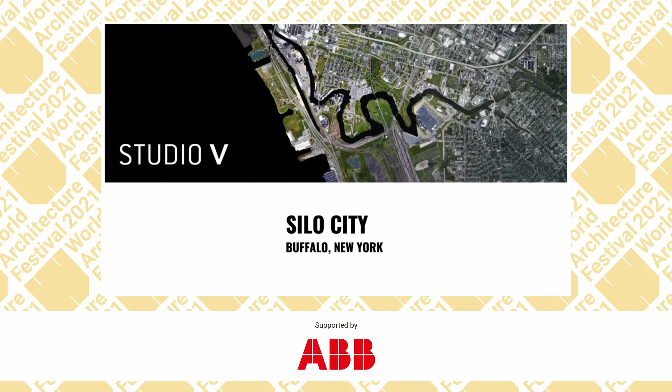I was born in Buffalo, which I consider to be one of the greatest ruined cities in America. My father worked in the steel mills and my mother taught English. So this led to my two interests in abandoned industrial landscapes and their effect on community and culture.

Buffalo has the largest collection of grain elevators in the world. This led to an incredible period of urban growth, and these are the examples that really redefined modern architecture. These are the grain elevators visited by Gropius, Mendelsohn, Le Corbusier that really influenced the whole course of modern architecture. Mumford talks about cities, the things we need to make them.

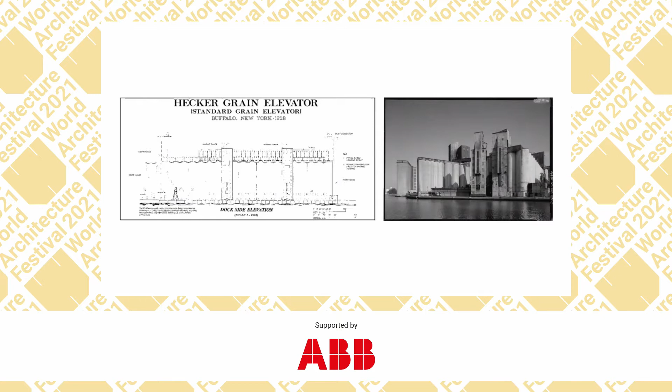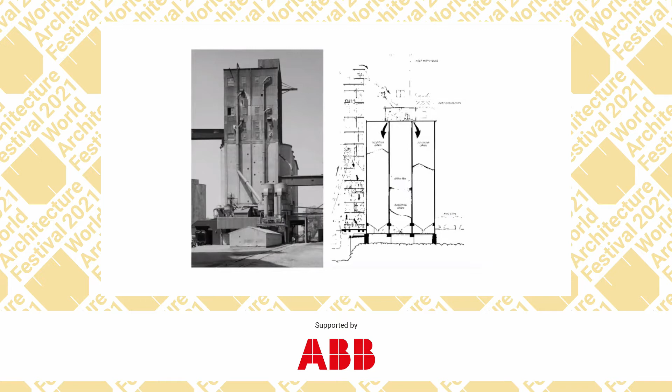They begin with the castle and the shrine. These are kinds of new citadels for cities with no walls, but really the granary and the development of the granary actually led to, in the grain elevators, the explosion of urban growth that occurred across the world.

Today, these buildings lie in ruins. They're abandoned. These beautiful massive structures have incredible, almost limitless interior spaces. And so really, the question is, what could we do with them today?

This actually shows some footage of the surrounding area where you get a sense nature has started to take over the grain elevators. Their concrete forms are in contrast to the kind of greenery that has begun to overtake them as a series of gardens and ruins. The relationship of these great rooftops to the surrounding oceanic lake of Lake Erie really made them very, very incredible in terms of their relationship.

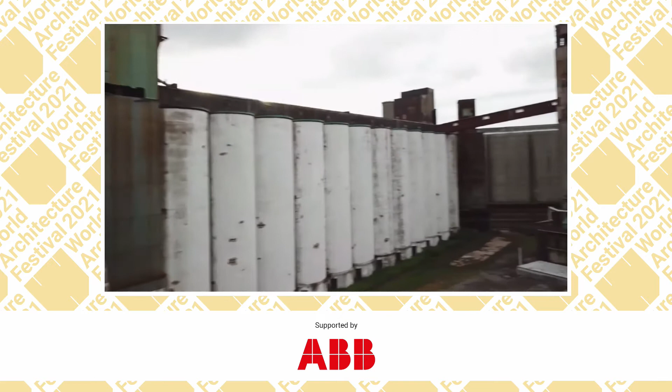And they were purchased by a man named Rick Smith, a very unusual man, a third generation entrepreneur. He started to ask how he could develop a vision for these, to create something new, to bring them back. He's a musician, a dreamer, but he inherited a massive steelworks, and he asked us how we could start to come up with a new idea for them.

So I begin with something a little bit unusual, because unlike most architecture looking at future projects, we thought, how could we create something that is not one singular vision, but that constantly changes over time, like the grain elevators themselves? And so I reference in 1836, just 6 years before the grain elevator was invented, there were these wonderful paintings by Thomas Cole.

They were called the Course of Empire. And they tell the story and the arc of change of architecture and how it can grow, and civilizations and empires. It's interesting to me because it creates almost this architecture of obsolescence.

And Buffalo grew from a wilderness city to the grain elevators, which actually led to an explosion in growth. So I'm kind of paralleling the two series of paintings and showing the relationship between them over time, including how it led to the kind of end of the city. So my question is, how could this influence a future project for the grain elevators?

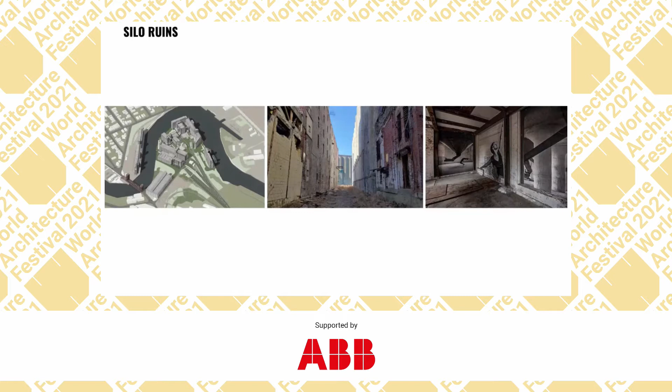Now, we had to document them. We had to go in with drones and interns. It's really an entire city of grain elevators. And we decided not to embrace just one design, but a series of concepts that would overlap four of them.

The first is called Silo Ruins. The whole idea was that it would be a campus with greenery near the river, embracing the ruins, starting to restore the wounded landscape of the Anthropocene and start to engage and tie in with the community. We worked with a whole series of community volunteers to create a series of gardens, including places to gather, initial structures like the Lyceum and Duende, a bar, as well as doing things like occupying the ruins, providing tours.

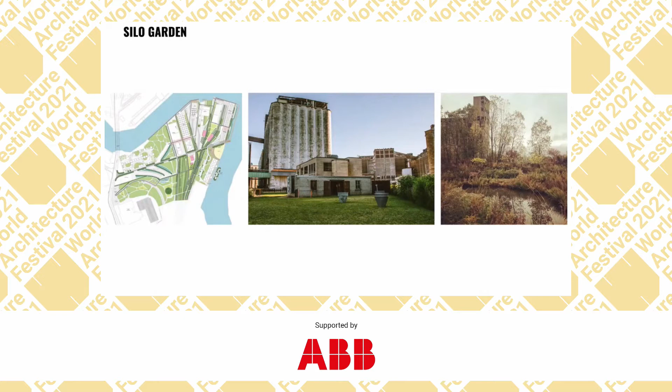And so the next step is silo gardens. These overlap in a certain sense, where we started to create a series of gardens between the silos. This is a future project because it's underway now, but the larger vision is only just beginning to be realized. And so this shows how we start to use bioremediation in order to reclaim native species. We start to showcase how the greenery has overtaken the grain elevators.

And then we started to cultivate new gardens in and around them, with tours to start to really develop it as a site where people could come in the future.

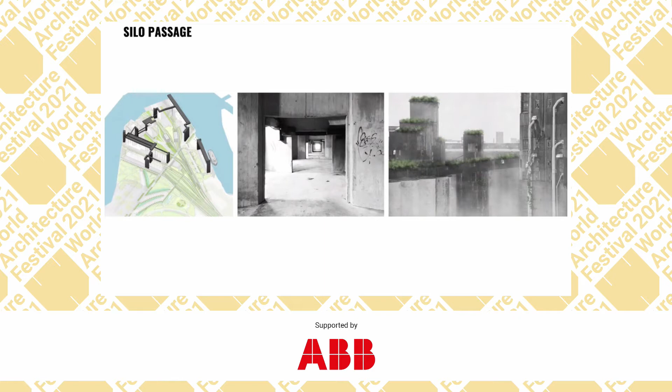Silo Passage is the third phase, where we're looking at taking the elements at the rooftops—a series of conveyors, a series of connections, a series of abandoned bridges—and using them to make one passage that actually connects all of the different grain elevators and the surrounding mills.

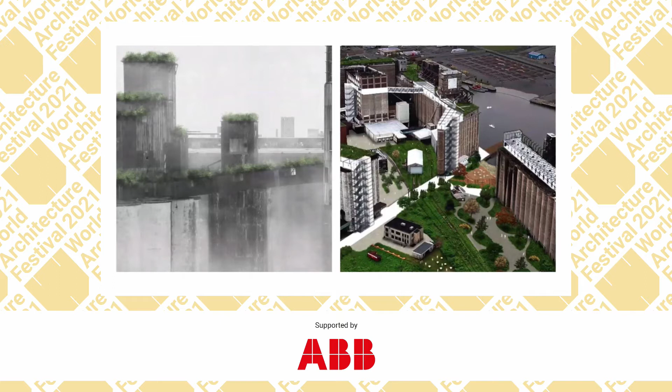The idea is to really create links and connections with these former abandoned spaces, these conveyor spaces, these bridges in the sky, that would link all of the different components and create a series of walkways capturing green roof gardens and extensions all the way through the entire complex.

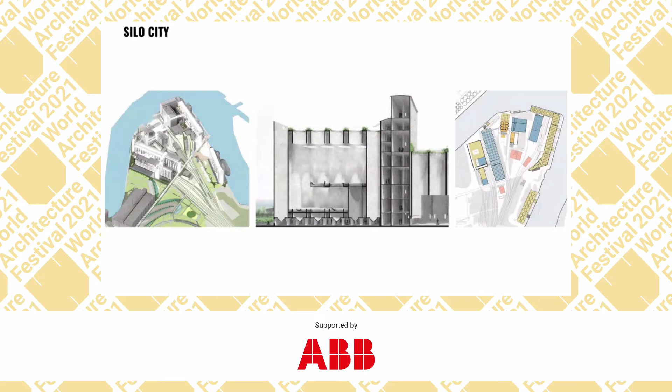The last phase is Silo City, where we're actually looking at a greater vision for the entire community. Different types of architecture in the silo and mill buildings led to different approaches.

The silos themselves—we're looking at arts and cultural spaces. We're not really cutting windows in them. We wanted to actually make spaces that would preserve the integrity of the structure.

But in the mill buildings, we could create a series of spaces that would actually support the arts and cultural uses. So we're looking for a great range of spaces.

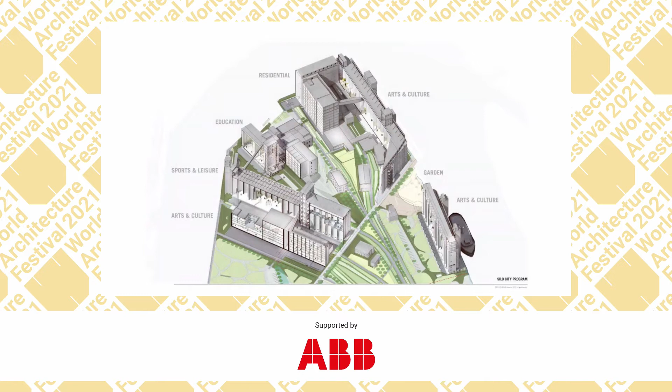And we started to do performances, venues, operas, spoken word, different kinds of connections within them, leading to a larger vision for the entire complex where each of the individual buildings would have different program components.

We would link them together with a series of gardens and reconnect the waterfront with a whole series of different uses, reinventing the nature of arts and culture by carving out the volumes within the interior and using the mill buildings in between for more standard uses such as residential, affordable housing, artist housing, makerspace, to support the more unusual spaces within the elevators themselves.

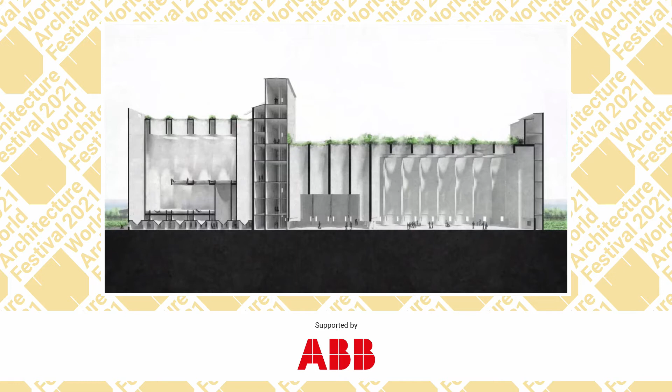The elevators are perhaps the most interesting part. Working with a brilliant structural engineer, we found we could carve out the volumes from the interior, top-light these spaces. We're looking at a combination of galleries, museum spaces, gardens on the rooftop with a series of skylights.

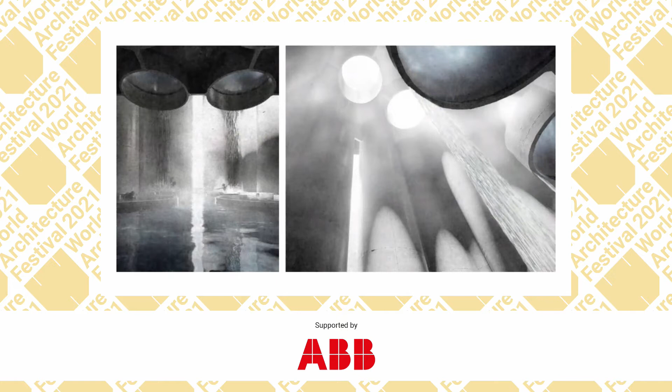But also more shocking uses, such as the image on the right, where we're creating a vast natatorium, almost like ice cube trays, where we fill the silos full of water and do a series of cascading gardens and waterfalls, beautifully lit from above, from the tops of the silos, to maintain the integrity of the structure.

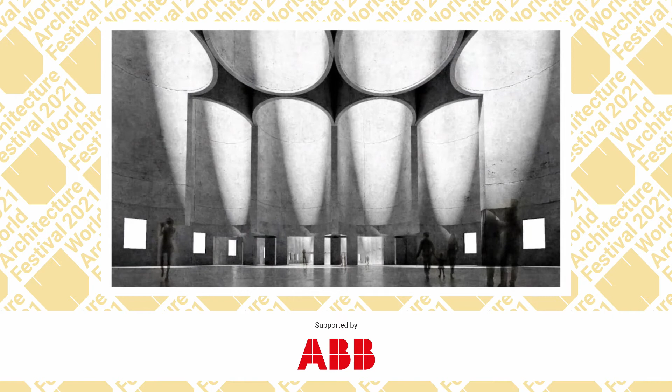In other spaces, we can create galleries and art museums, large open spaces that can support different arts and cultural uses. We're working both with local artists to do installations and spaces within here, and contacting institutions to see if we can combine unknown artists with those that are more famous.

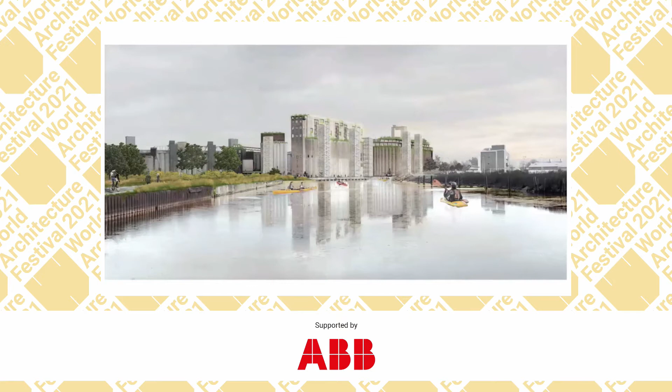As I begin to look at the end of it, it's not just one single vision, not just one idea that's fixed in time, but the notion is that as a future project, this will constantly change. The spirit of it is that it will never really be one single place, that we're not looking for a final product or a phased approach.

It will always exist partially in ruins. It will always exist partially as finished buildings. It will always exist partially as gardens. And so I would finish with this brief film.

Silo City was the foundation of Buffalo's prosperity, but it isolated and disconnected this area.

The demise of the grain trade left Buffalo with a bunch of hulking titans of former wealth creation and a whole bunch of members of our community here without jobs. And now we have this rare opportunity to take these ruins and use them as a vehicle to reconnect the surrounding community.

Nature has begun to take over the site, and we enhance that with bioremediation projects that support the future growth of gardens and habitat. Biodiversity is what makes a place resilient.

This is the perfect gathering space where people can actually interact with the environment and not just as a spectator. Occupying the ruins is part of the idea.

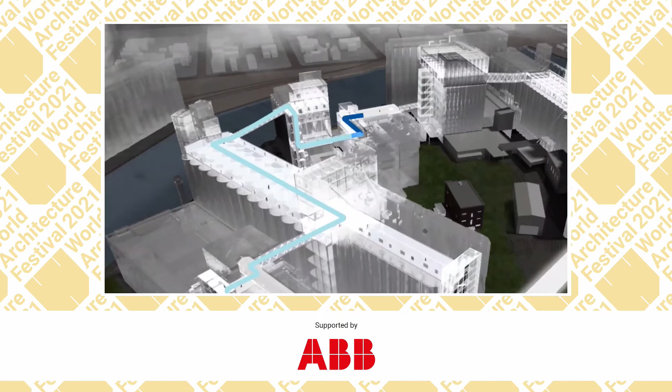We're going to create pathways and passages across every level of the buildings, gardens in the sky with views over the lake. But it also means making new links to the surrounding parks network.

We're partnering with community leaders to create walkways from abandoned rail lines that currently divide the city. At the heart of this green network will be Silo City.

The design for Silo City adapts the revolutionary structures into vast arts and cultural spaces with affordable housing, galleries, auditoriums, maker spaces. And like a city, it will never be complete.

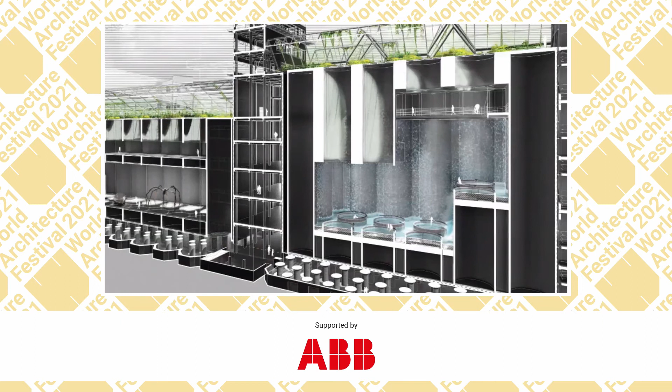It grows from the people who use it. And when the city of Buffalo inevitably changes, Silo City is going to change with it.

So I'd very much like to thank the jury for considering this project, and to say that in the end, Silo City is really a vision for the reinvention of cities—not just Buffalo, but for the industrial ruins of the 21st century—and how we can create a renewal of this kind of architecture for our children and those to follow.

Thank you. Well, thank you very much. Anko, would you like to start with this one?

Of course. So honestly, I haven't really gotten a sense of how you're looking at using the structures themselves programmatically, apart from one of the references of the gallery. But I would assume it will take a lot more dimension in terms of programmatic planning to give life to these structures and bring them back into the urban fabric, given the complexity of the volume and the built mass of the industrial legacy. So perhaps you can speak a little bit more about how you're looking at that.

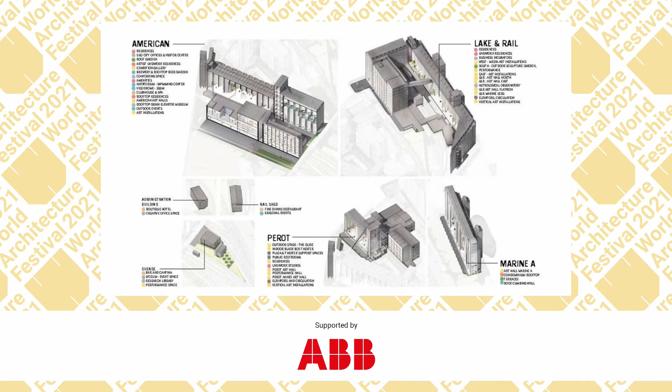Sure. So what's very unusual about the collection of grain elevators in Buffalo is there are two structures, interwoven: the elevators themselves—the concrete silos—as you see in the upper left, the American, and immediately next to them are masonry structures that were mills and malt houses. This was partly due to the nature of the Erie Canal, because it would shut in the winter, so they had to process the grain during the off season. In the larger complex, the silos are interspersed with brick structures, leading to two program requirements.

The silos themselves, which are so incredible and difficult to reuse, we decided to use purely for arts and cultural uses, as well as physical culture, body culture. So we're creating galleries, museums, exhibit spaces, performance spaces, but also a natatorium—a vast swimming pool—and a velodrome, a vast biking ring within it.

The mill buildings, which are in between them, are far more conventional—really masonry, brick structures in which we can put windows. For those buildings, we're doing housing, affordable housing, artist housing, maker spaces, creative commercial spaces, and a bit of hospitality in some of the small scattered buildings and sheds in between—restaurants, cafes, bars.

The whole thing is connected by a series of gardens that follow the original trail of the rail lines, as you can see here. They create radiating patterns that link the buildings together. So hopefully that explains how the program responds directly to the typologies of the architecture.

Right. Mariana, do you have a reaction to this?